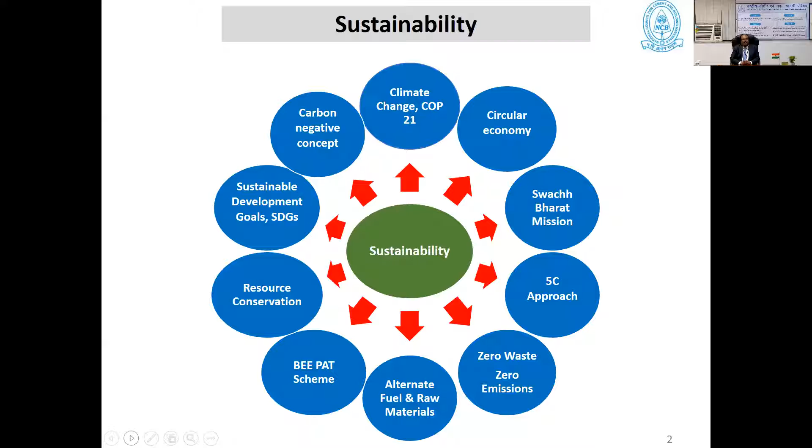In the 5C approach, in the cement industry we produce clinker, then cement, then building materials take it as raw material to make concrete, and ultimately construction and carbonation. This is the 5C approach.

For clinker, our target is less consumption of limestone and fuel. That's why alternate raw materials and alternate fuels can be utilized as a part replacement of clinker. Similarly for cement, we use less clinker to reduce carbon dioxide emissions.

We are making blended cement, utilizing fly ash and slag, which are largely industrially available materials, so the clinker contribution to cement will be minimized.

Similarly with concrete, we have to make concrete with less cement consumption, and use admixtures to optimize the mix constituents.

And for construction, similarly carbonation will also be reusable. Carbon dioxide emissions from the calcination of limestone to make clinker can be stored, and that stored carbon dioxide can again be utilized for the carbonation properties of concrete.

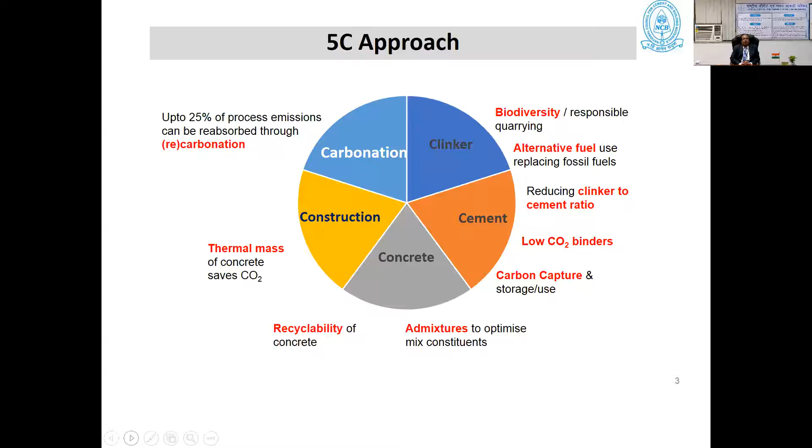In NCCBM, depending on the requirements of the industries and building materials, we have made 22 expertise teams, including mineralogy and microstructures, new clinker systems, low carbon cement, high temperature technologies, XRD and XRF SRM, advanced analytical techniques, alternate fuel and raw materials, advanced comminution and particle technology, and advanced pyroprocessing.

This is completely related to the cement industries, along with energy conservation, renewable energy, carbon capture and utilization, and power system instrumentation. These are the expertise teams supporting the cement industries.

Structural design and seismic evaluation, geopolymer concrete, repair materials and rehabilitation, advanced concrete composites, reinforcement, corrosion prevention and mitigation, concrete durability and microstructures - these are the groups working for the durability of the latest designed concretes.

For BND and SRMs, you may know about Nirdeshak Dravya and standard reference materials also developed by NCCBM. We have replaced 12 standard sample BNDs, helping with import substitution. Under Atmanirbhar Bharat, this is an important project we are conducting with support from the National Physical Laboratory.

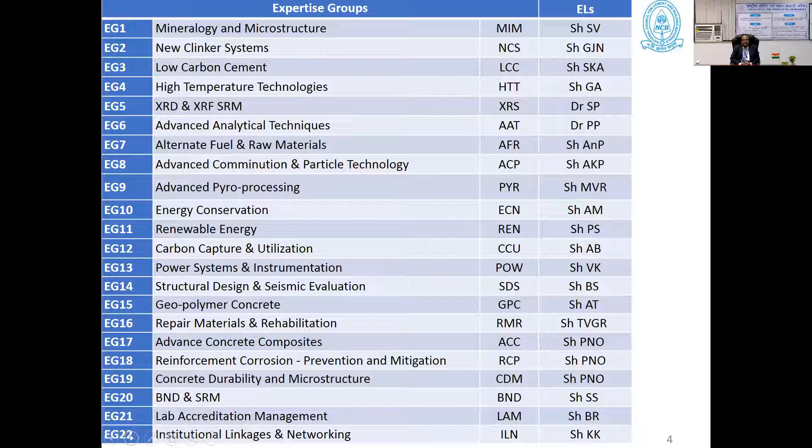Regarding carbon dioxide emissions from the Indian cement industry, it is often considered among the highest polluters, but it actually contributes only 7% of anthropogenic carbon dioxide emissions. The total carbon dioxide emission from the Indian cement industry is 200 million tons per annum.

The target for reduction of carbon dioxide emission was 1.12 tons of carbon dioxide per ton of cement in 1996, and it was reduced to 0.670 tons of carbon dioxide emission per ton of cement by 2017.

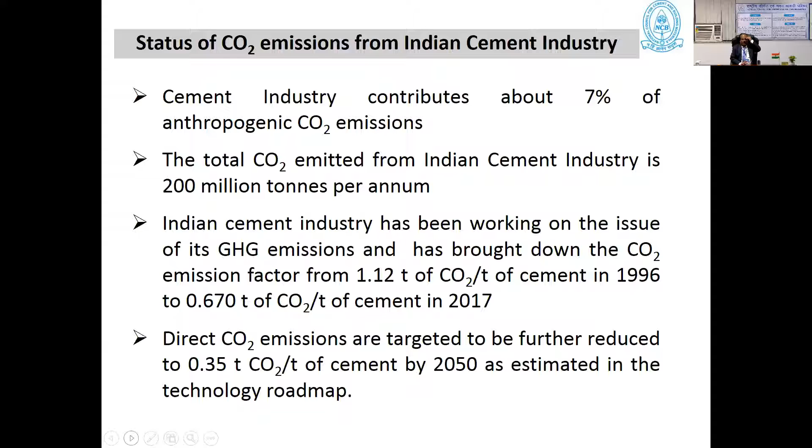So the target is still there. We have to reduce the carbon dioxide emission per ton of cement to 0.35 tons by 2050, as estimated in the technology roadmap.

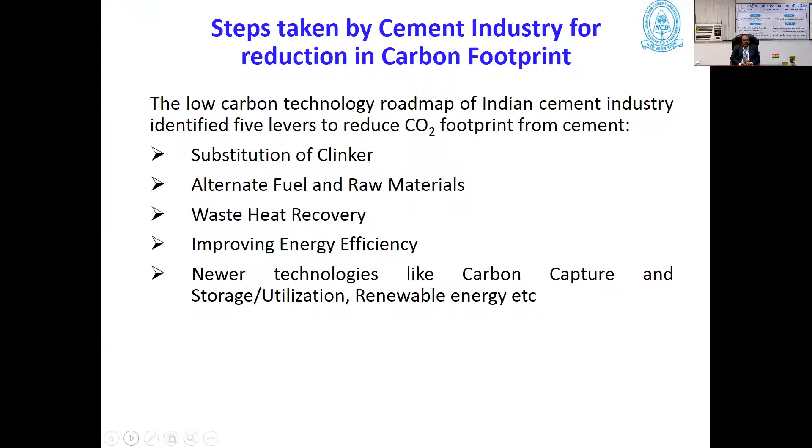So for that, the steps taken by the cement industry for the reduction of carbon dioxide footprint involve 5 levers: substitution of clinker, alternate fuel and raw materials, waste heat recovery, improving energy efficiency, newer technologies like carbon capture and storage, and utilization of renewable energies. These are the 5 levers we are working on together for the reduction of carbon dioxide emission.

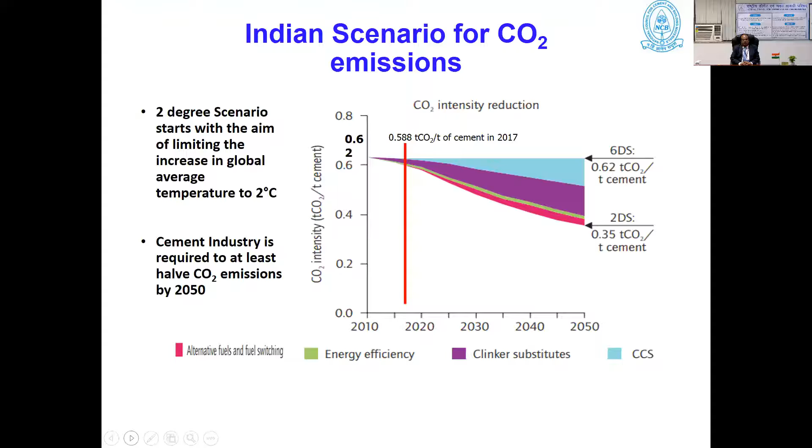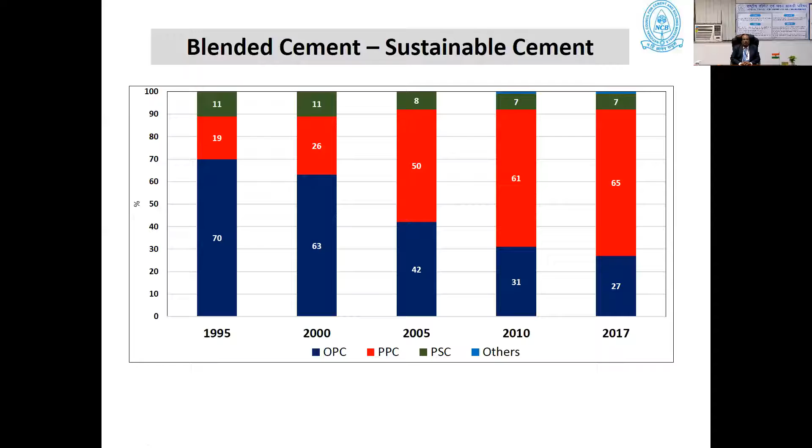Now you see the blended cement distribution in India. In 1995, OPC was 70%, PPC was 19%, and Portland slag cement was 11%. With advancement, by 2017, OPC dropped to 27%, PPC rose to 65%, and PSC became 7%. So 65 plus 7 equals 72% total blended cement produced out of 100 in India.

And steps undertaken for NCCBM low carbon cement - beside this cement, NCCBM is doing continuous research on the development of new types of cement, also for the reduction of carbon dioxide emission.

For that, you see Portland limestone cement, where limestone can be utilized from 15 to 35%, with different grades of limestone. Also Portland dolomite cement - dolomite is not currently utilized in cement manufacturing, but here we can see it can also be utilized as a clinker replacement, making Portland dolomite cement.

So we think that by utilizing this fly ash and limestone, there is potential for the reduction of carbon dioxide emission. Then develop low carbon clinker - belite calcium sulfoaluminate clinker and cement.

This is a new type of clinker NCCBM developed, because for the last 50 years we have been producing high C3S clinker, resulting in utilization of high grade limestones and thermal energy requirements like 1450 degrees centigrade, with higher carbon dioxide emission. So now by developing this low carbon clinker, there is potential to reduce carbon dioxide emission by 30%, and also thermal energy can be reduced by 200 degrees centigrade.

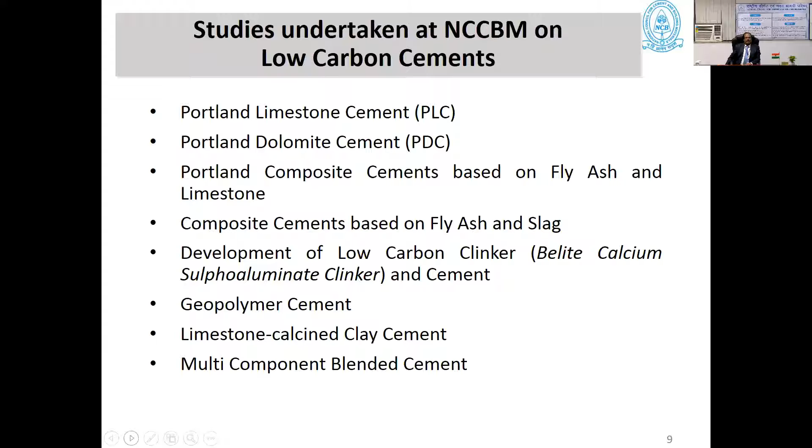And now we are taking up the project completely - clay available in India, different types of clays, and how to make it calcine and incorporate it into cement. Similarly, multi-component blended cement can also be utilized, a 4-component system with slag, fly ash, limestone and clinker together. In this respect also, we are doing work.

A new clinker, which we have already discussed, has about 52% beta-belite, alite, and a new phase developed - 22% ye'elimite, that is calcium sulphoaluminate. With this clinker, we have seen it gives high compressive strength in 1 day, and the rate of development is lower, but at the same time we are getting about 48 MPa strength in 28 days.

This clinker has been developed by utilizing low grade limestones and industrial waste, and we have seen that the firing temperature has reduced by 200 degrees centigrade - at 1250 degrees centigrade, this clinker is completely formed.

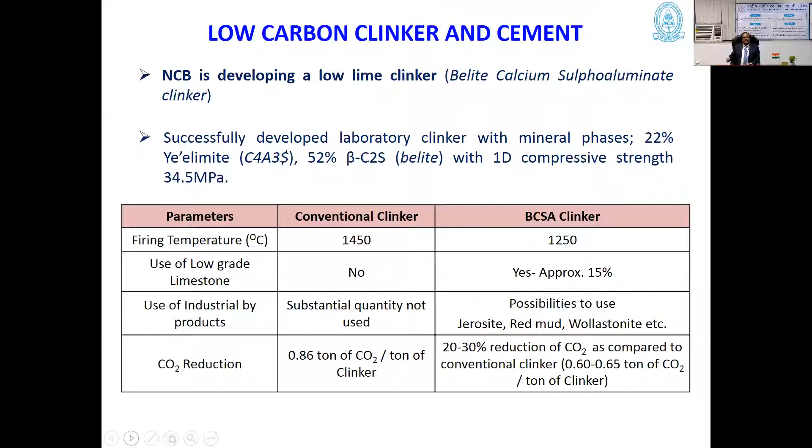A low-grade limestone can be utilized up to 15%, and industrial byproducts can be utilized as a source of iron and sulfur. Jarosite, red mud, wollastonite—these are byproducts of different industries that can be utilized, and by that, carbon dioxide reduction will be 20 to 30% as compared to conventional clinker.

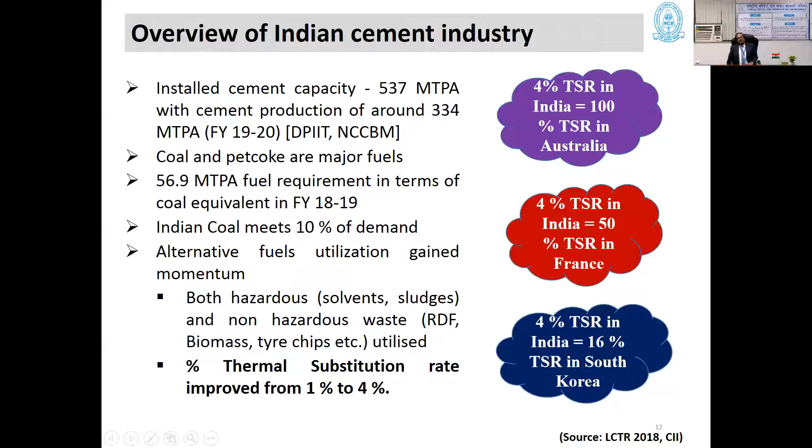Then alternate fuel use in the Indian cement industry—this move was also taken from 2005. An alternate fuel means any material having calorific value, like plastic waste, polythene, agricultural waste, carbon black, or tire chips. Those having heat value can also be replaced as a fuel in the cement industry, which also utilizes it as a source of fuel.

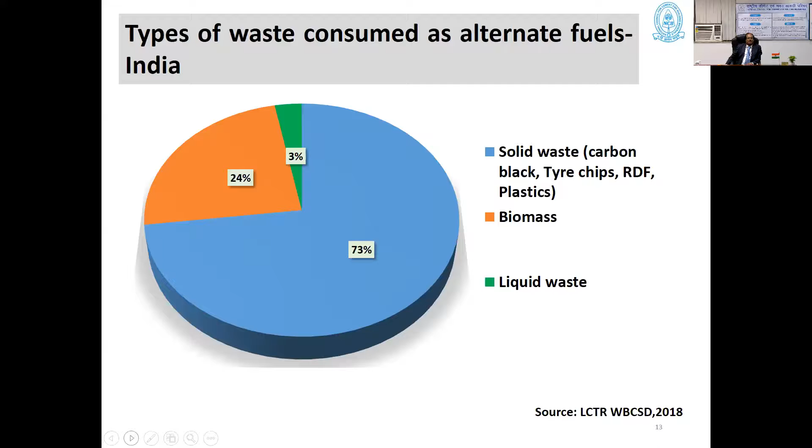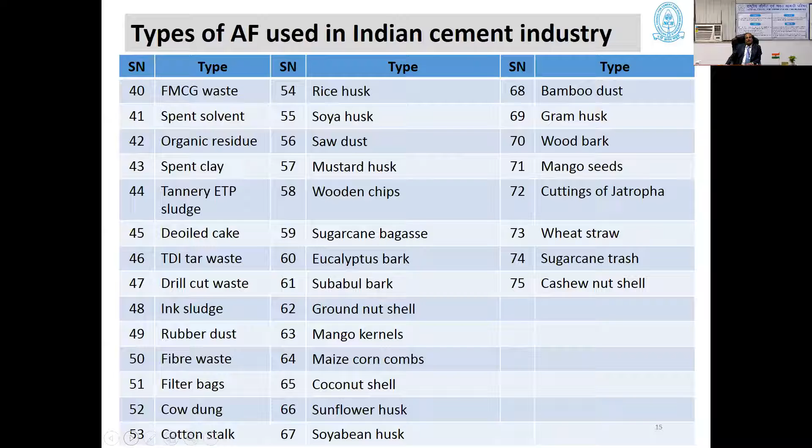You can see from the graph: 75%, 73% solid waste, carbon black, tire waste, RDF plastic—this is the percentage we can utilize. Also liquid waste from pharmaceutical sources, having hazardous and calorific properties, can be utilized. You can see the inventory of the Indian cement industry—these are the different types of wastes that have been inventorized. About 75 types of material have been identified that can be utilized as alternate fuel.

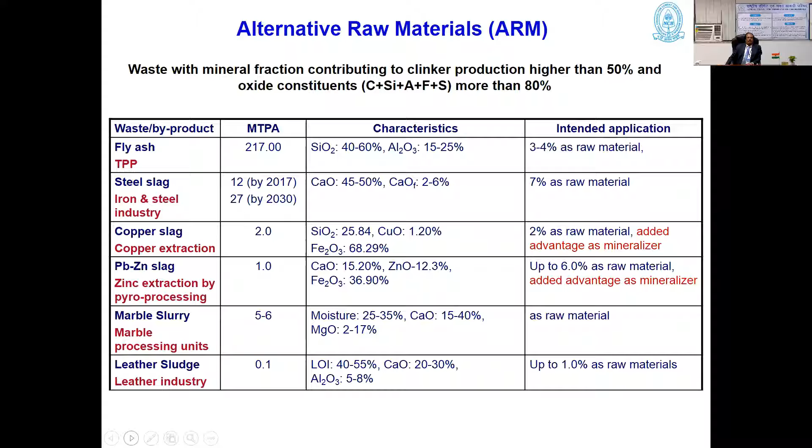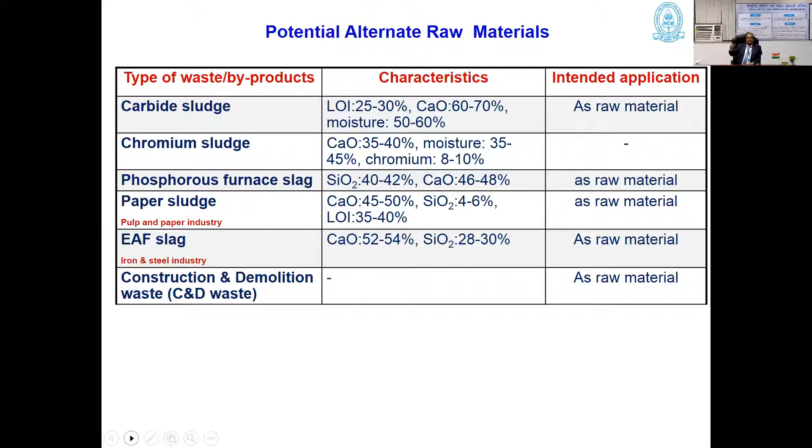Similarly, alternate raw materials—now we are using limestone, clay, and moram as the alternate raw materials of cement. But at the same time, industrial waste like fly ash, steel slag, and other materials having alumina, silica, and iron can also be utilized as alternate raw materials. So our first task is to identify the different types of raw materials that can also be utilized as alternate raw material in the cement industry.

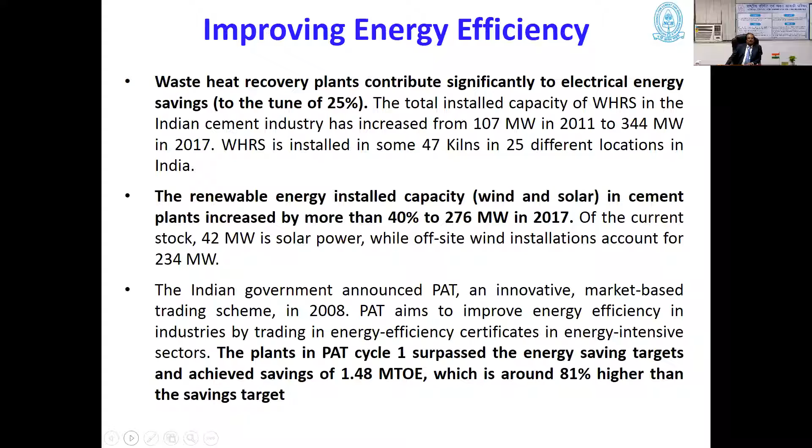The third lever is energy efficiency. Here you can see how to recover energy—electrical energy, and also wind energy, renewable energy, wind and solar. Waste heat recovery systems have already been implemented in so many industries. At the same time, we are exploring renewable energy installed capacity like wind and solar. By this, we can reduce energy use, and the plant's PAT cycle can surpass the energy saving targets, achieving a saving of 1.48 MTOE, which is around 81% higher than the saving target.

Regarding energy efficiency, NCCBM has expertise in the energy efficiency group. NCCBM is an accredited energy auditor, and 7 certified energy auditors are already there. NCCBM has been actively involved in development of normalization factors on the PAT scheme, and NCCBM has carried out over 100 energy audits of cement plants.

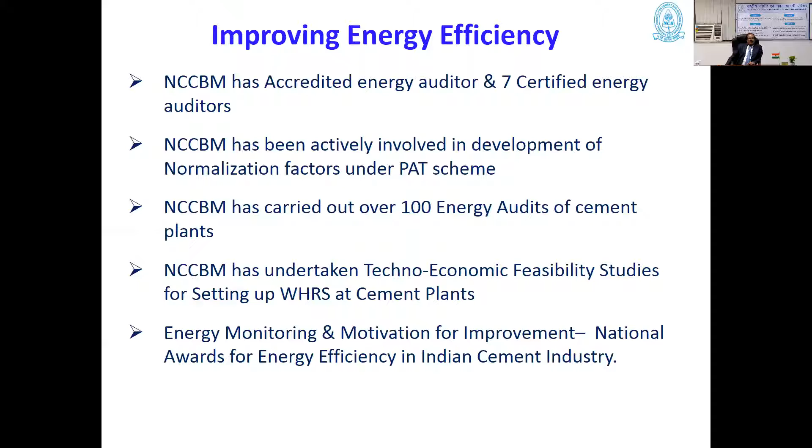NCCBM has also undertaken techno-economic feasibility studies for setting up waste heat recovery systems at cement plants, along with energy monitoring and motivation for improvement. National awards for energy efficiency in the Indian cement industry are also conducted by NCCBM.

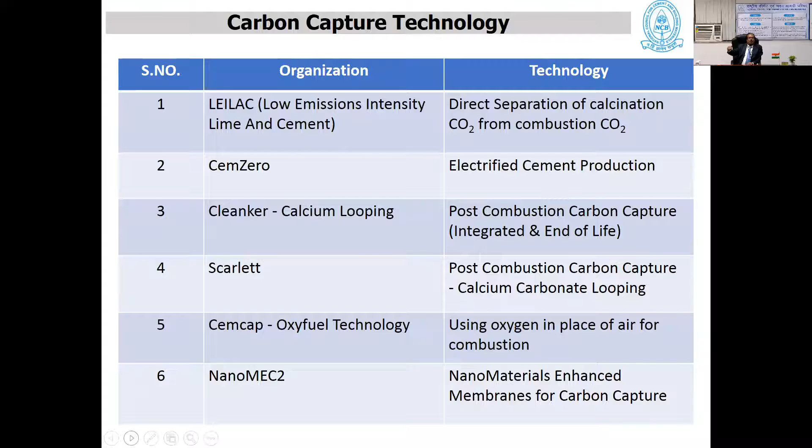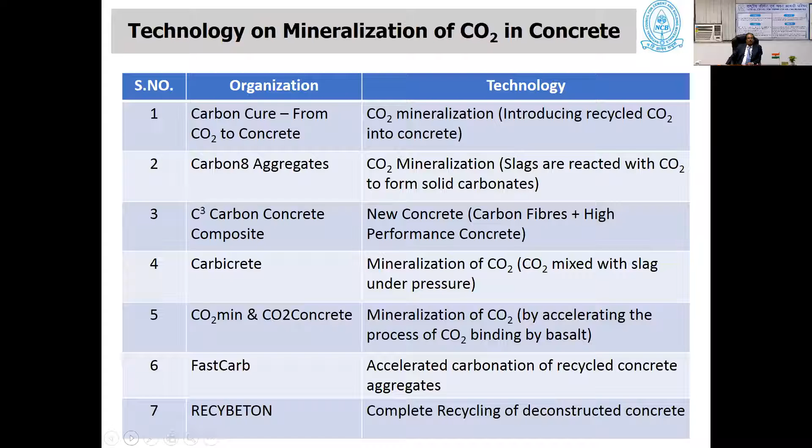For studies undertaken for resource optimization, NCB has already done work on high magnesia clinker, where 8% clinker can be successfully utilized for the production of PPC and PSC, so that MgO, having certain limits, can be utilized in the production of clinker. This will also save about 15 years of life of the limestone reserves.

Similarly, slag, synthetic slag, and other coarse fly ash of 200 to 250 square meters per kg are not utilized now in the cement industry. We are also taking up projects on how to utilize this coarse fly ash.

Development of fly ash with geopolymer concrete, also less cementless concrete. Ferrochrome slag as a fine aggregate and coarse aggregate in concrete. Study and preparation of specification guidelines for use of coal-based bottom ash as a replacement of fine aggregate, and study of the use of C&D waste in low volume concrete roads.

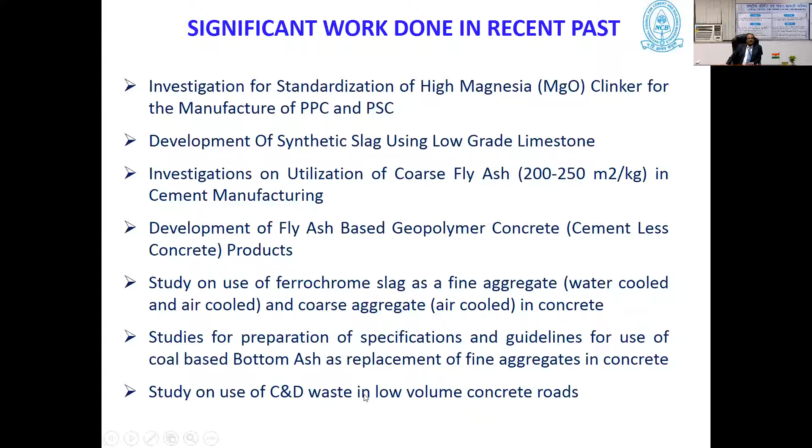This work has been undertaken in our CDI department. Thank you for your kind attention.